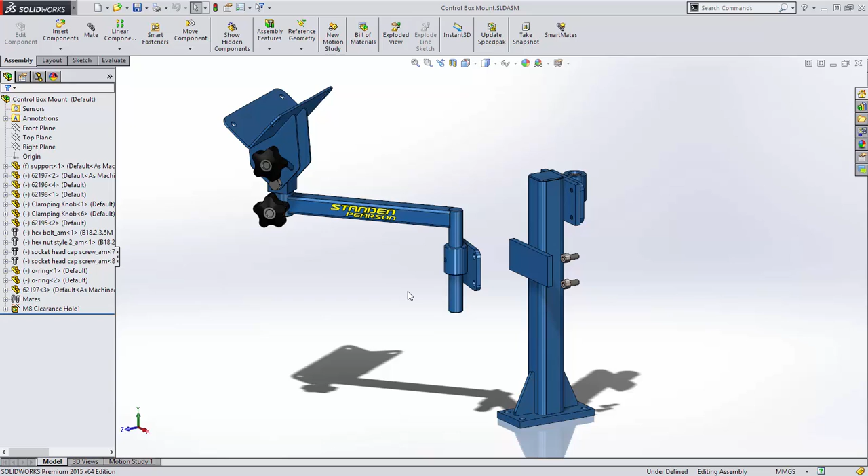When mating two items together, it's often important to make sure that they are centered to each other. For this, SolidWorks provides a new mate, the Profile Center Mate.

This mates the selected items to each other regardless of their sizes, shapes, or if they change in the future. An offset is provided if necessary, and for non-round selections, the orientation can be changed in 90-degree increments.

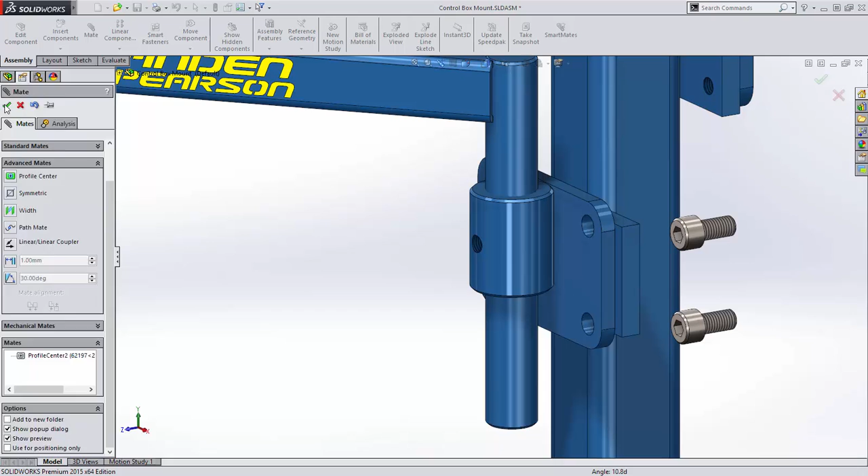If the sizes of the selections are changed, the Profile Center Mate maintains the intelligence to keep them centered. If the location of one changes, the other moves to honor the Profile Center Mate.

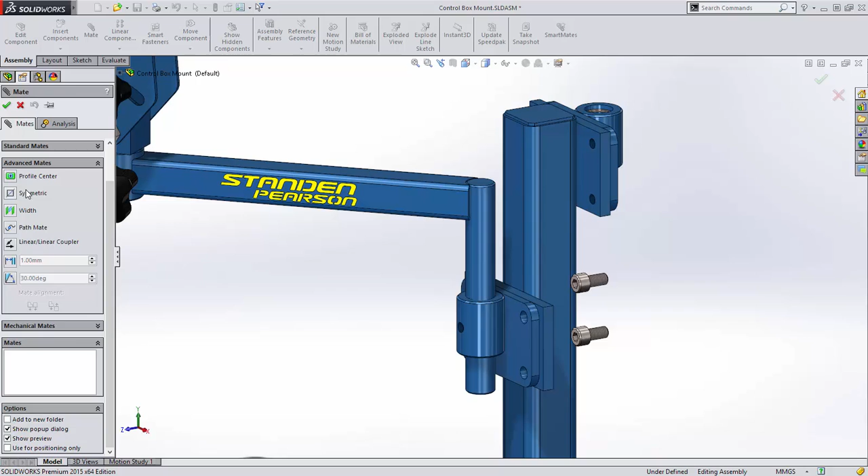Very powerful, but that's not all. The Profile Center Mate can be used to fully locate round items such as screws. This locks the two circular profiles to each other, and their rotation can be locked as well.

Just one mate to fully locate a screw. That is going to save a lot of time and help keep down the number of mates in an assembly.

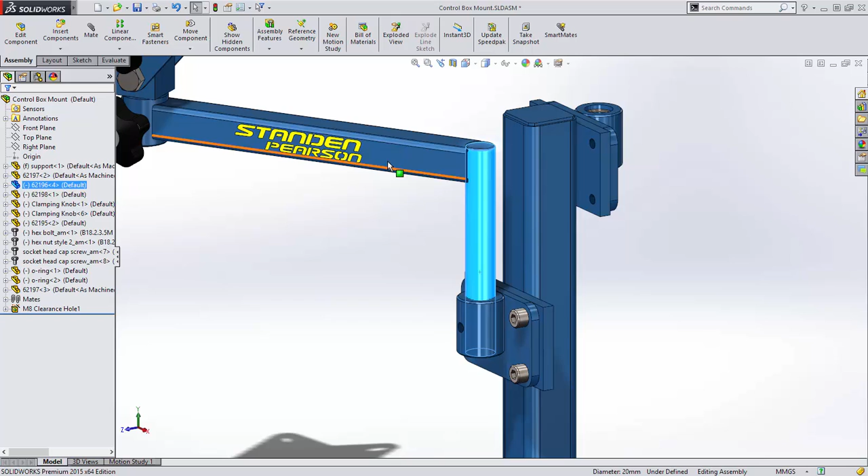This arm is assembled concentric to the bracket, but it's not positioned along the axis. We could figure out the dimensions and add a limit mate, but the width mate now offers options other than just centering the components to each other.

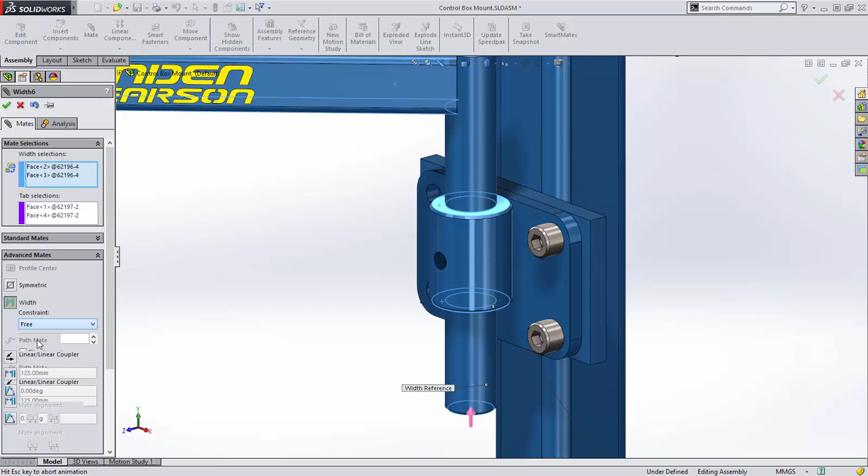Similar to the slot mate, components can be positioned by a dimension, percentage, or in this case, free to move within the bounds of the selections. Now the arm behaves exactly as we want and will do so even if the parts change.

A limit angle mate is required to position this pin to the slot to control movement. Notice that the dimensions that are presented may not be exactly what you're looking for.

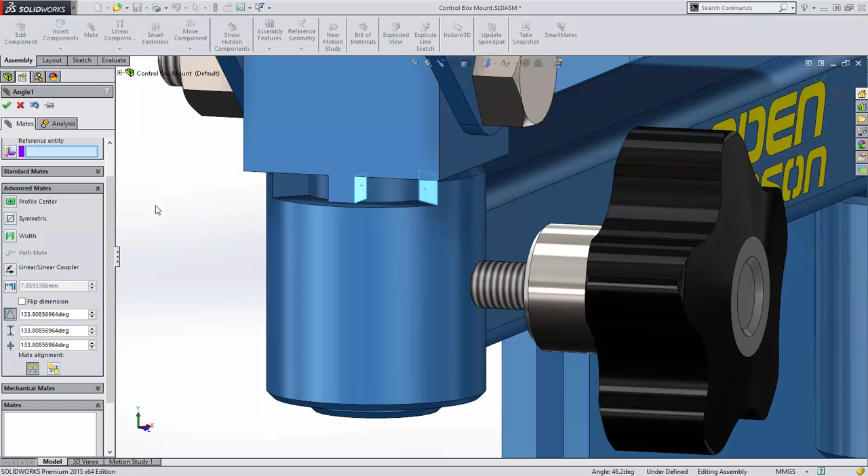Now a pivot reference vector may be selected to guarantee the proper solution and eliminate any angle flipping. The reference can be chosen manually, or SolidWorks can automatically figure it out based on other mates in the assembly.

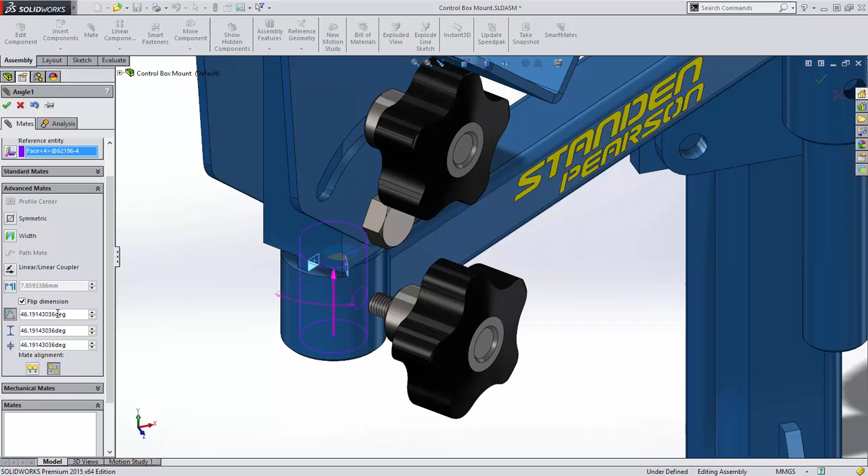This presents the pivot vector and a quadrant selection tool that allows you to select the desired angle dimension. The dimension in the Property Manager is updated to reflect the selection, and we can enter the required values.

When working with limit mate dimensions, we could always make on-screen changes to the current angle value, but now we can change the upper and lower limits on screen as well, saving steps of having to access the Property Manager for limit mates.

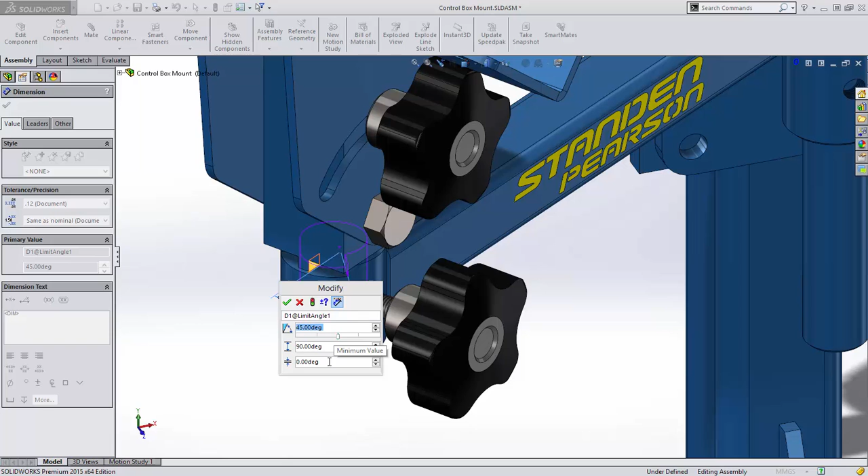SolidWorks pioneered assembly motion and allows assemblies to move just as they do in the real world, but when positioning components in assemblies that have many degrees of freedom, the motion can be fickle.

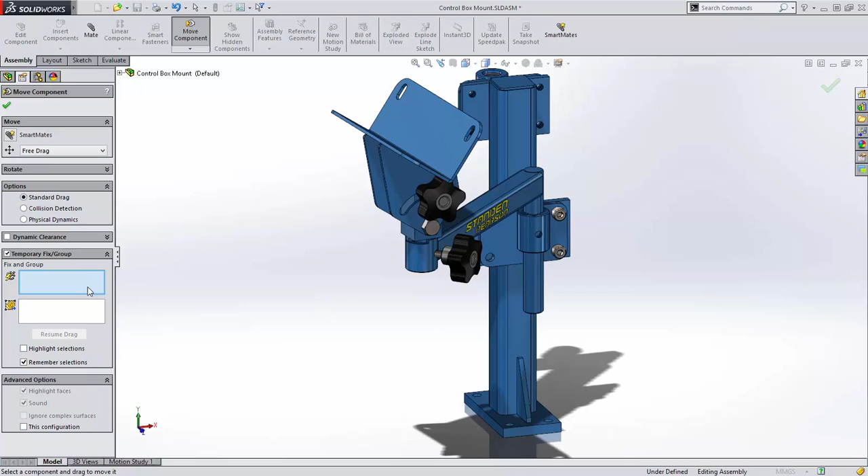This is overcome with the new capabilities of the Move Component command. Now components can be temporarily fixed so that the movement is much more predictable.

Not only that, you can temporarily group components so they move as one, making it much easier to get the assemblies in just the right position. These selections can even be remembered for the next time the Move Component command is used.

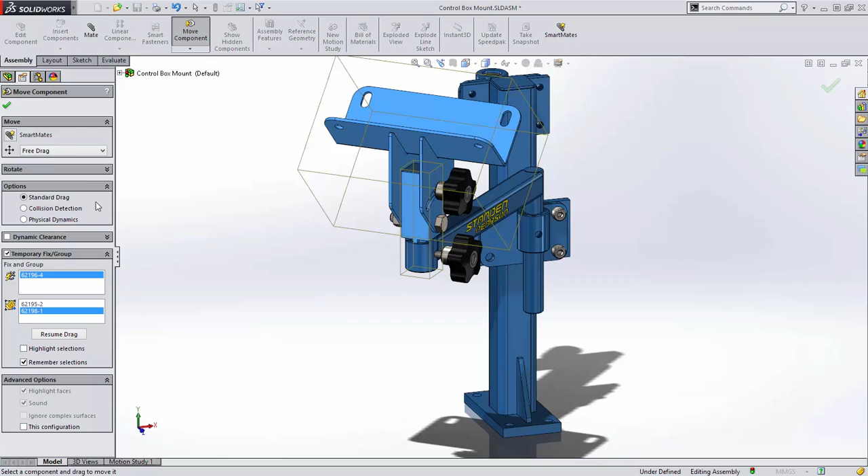Another clamping knob needs to be added to the assembly to lock the arm, and now when a component is inserted, a rotation pop-up is available to quickly orient the part to get it into rough orientation for the assembly.

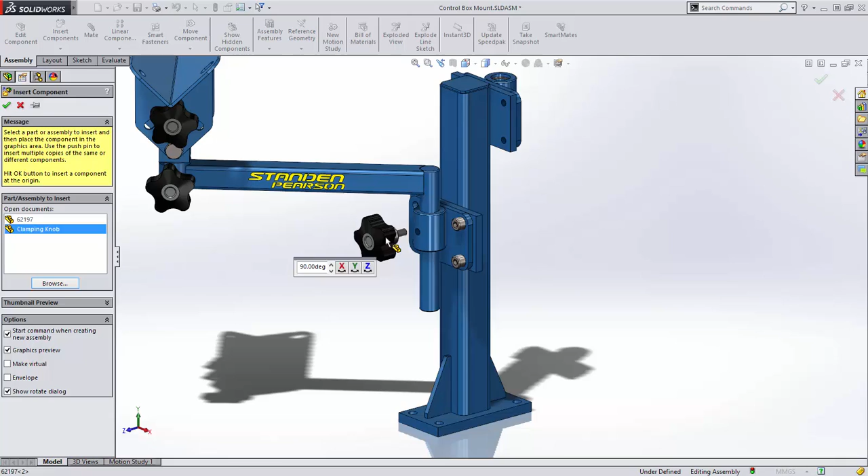With this new positioning, it's much easier to properly assemble the component without having to rotate it to get it close for assembly. Let's make this concentric to the tapped hole and tangent to the shaft.

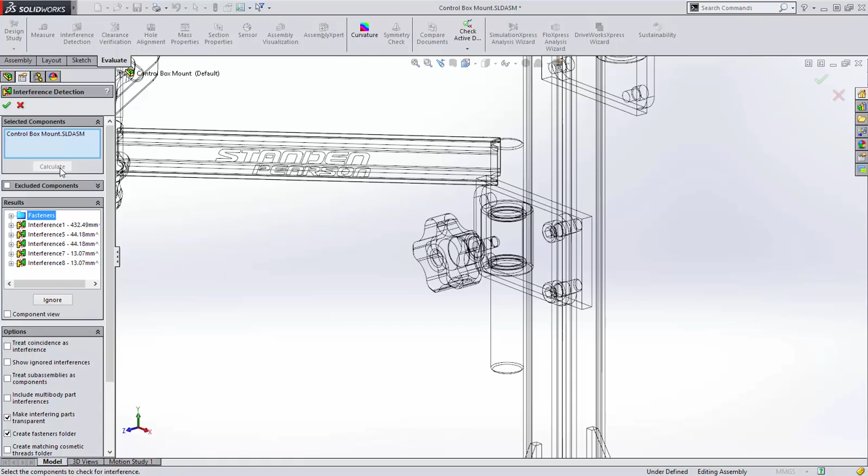Interference detection is a very powerful capability of SolidWorks to determine clashes before parts are produced, but sometimes small interferences are intended, such as press fits and when using rubber seals or O-rings.

This assembly reports several interferences between the bore of the bracket and the shaft of the arm, but also some small interferences between the shaft and O-ring.

Now in SolidWorks 2015, interferences are sorted from large to small. New controls are available to sort the interferences as well as zooming capabilities.

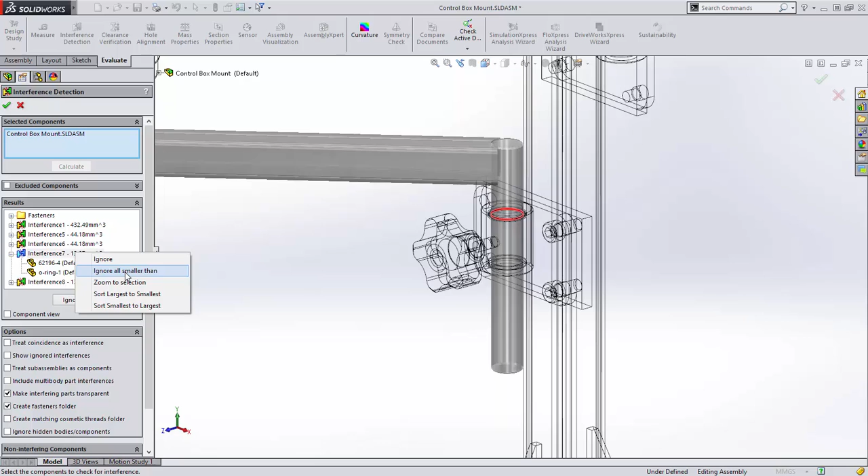There are also controls to ignore interferences that are smaller than a selected value, if that's not important, such as this O-ring. But we still need to fix the interference between the shaft and the bracket.

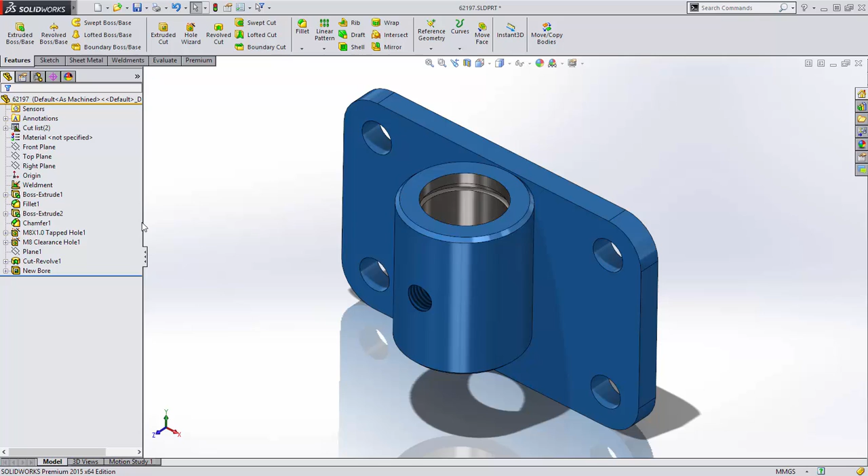Opening the part, we can see that someone was thinking ahead. Let's unsuppress this cut feature to reveal the new bore. Looks great. Going back to the assembly, we can see that this change has caused some problems.

Failed mates. Let's edit one of these concentric mates and redefine it to the outside cylindrical surface. Now, in SolidWorks 2015, we are presented with the option to replace all missing mate references that use this face.

Just like that, we've solved all the mate errors caused by the change to the bracket.

Sometimes it's necessary to make a variant of a part, such as this knob. So you open it up, save a copy, then do a replace component for this instance only.

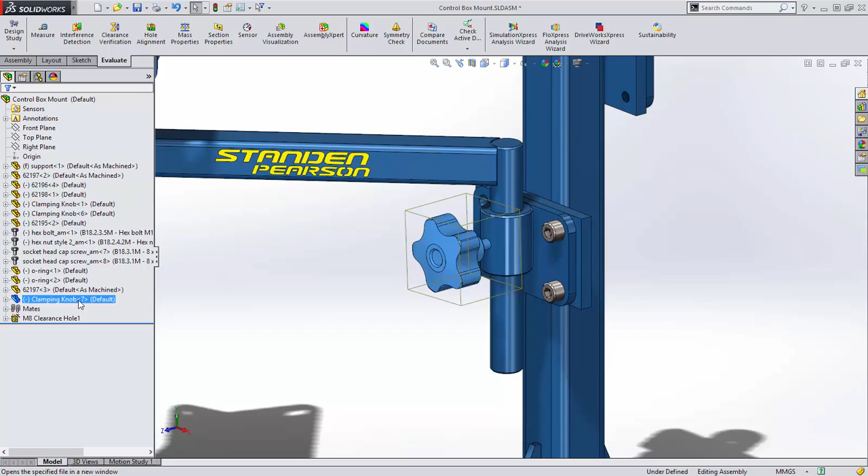Now in SolidWorks 2015 we eliminate all those steps. With a simple right click we can now make this part independent from all the others. And the unselected knobs in this assembly maintain their reference to the original part.

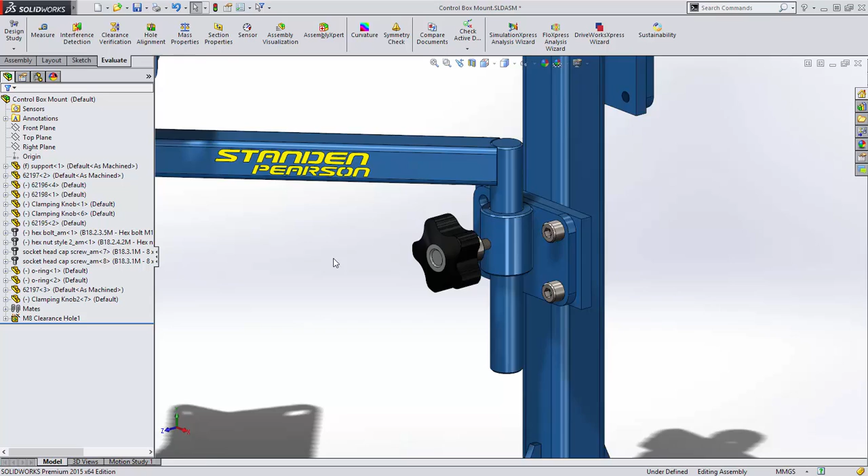In SolidWorks 2014 we provided the option to keep child features when deleting a parent feature. And in SolidWorks 2015 we've extended this capability to the assembly level as well.

Now when deleting a component we have the option to control the deletion of child features. These retained features can then be redefined to reference different components without having to recreate them.

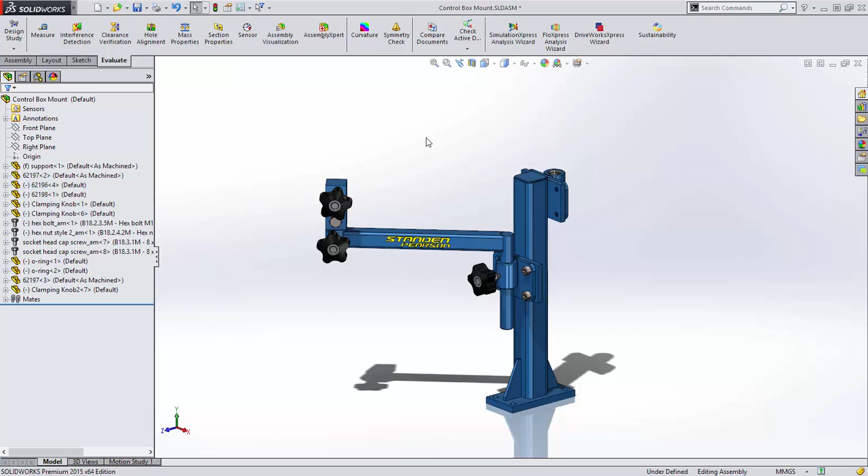Finally, we need to add an additional arm to the back of the support, and Copy with Mates is perfect for this. Now, this command supports symmetry and width mates, including the new controls for distance or percentage. Just select the references and you're done.